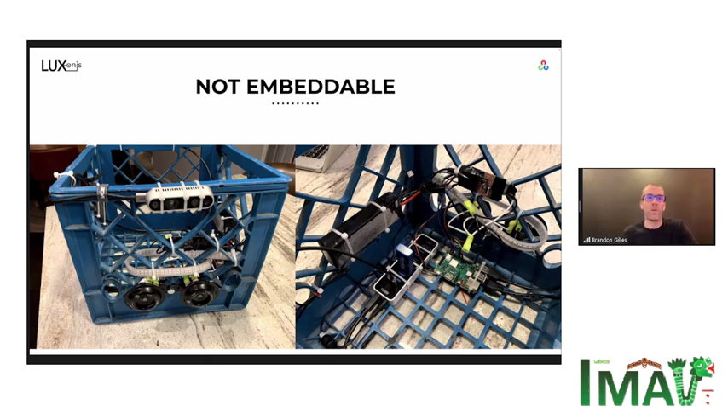But the problem was it wasn't embeddable, and I wanted to make a bike light that could just tell you if a car's on your trajectory for bike commuting. All the folks in my network who were hit were riding their bikes to or from work - every day they'd have 500 cars safely pass them for decades, and it's just that one car on your trajectory you want to know about. This proved you could do that with all the advances since the 80s, coming to being able to do it on the edge. I prototyped this in 2018, I think.

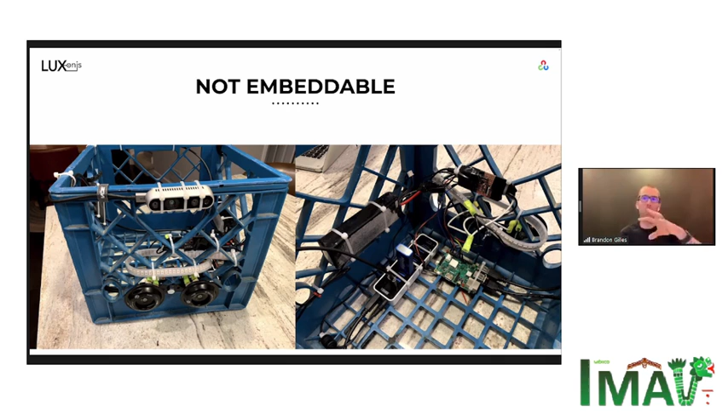This is somewhere between that laptop thing I mentioned from 2017 and now - this is like a Raspberry Pi with a bunch of other junk. But it's not embeddable, you can't really build a product around this. So we set off to see, could you make an actual embeddable version? Does that exist? And the answer is yes.

The Myriad X from Intel was the first thing in the world that allowed you to have all this stuff on an embedded system. You can see a US quarter there for reference at the bottom, and I'll hold it up to give scale. Hopefully my video is not too tiny.

The Myriad X was this really interesting chip, but given that it was so new and so bleeding edge, there was no way for just anyone, an engineer, to go develop something. So we found ourselves in this really interesting space that as engineers, we'd never been there before.

Usually when you go to solve a problem, you quickly discover it's a problem people already solve, and you just buy a development kit and go solve it in your application. Or you think, well, that's against physics, or maybe that will be possible in 20 or 40 years, kind of like the folks who were initially researching this in the 1980s for AI. It caused an AI winter because theoretically it was possible, but it required more computation and time than existed. With 1980s computers, it would take more than all the rest of human history to train a single neural network.

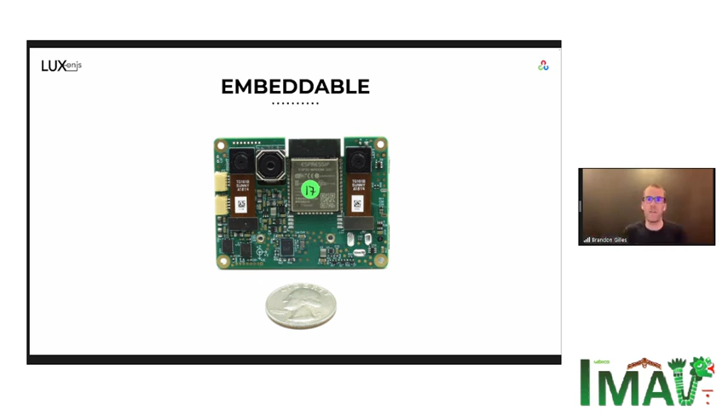So we built the development kit, and we built a series of products around that called the OpenCV AI Kit. So here's one of them.

We were in this space where for months we were just like, this is the chip. When's someone going to make something useful so we can use the chip? We want to use the chip. So we were scouring the internet, seeing what we could find, talking to everyone.

At one point I heard there was someone close to me, like a two-hour drive away, who knew something about it, and I instantly drove there and waited in their lobby. We really wanted this to exist because it would be so useful for us. We absolutely needed it, and we thought it'd be so useful for the world. But nothing existed, and we found that no one had any plans to make anything exist. So we either needed to just give up, which I tend not to do, or build the development kit.

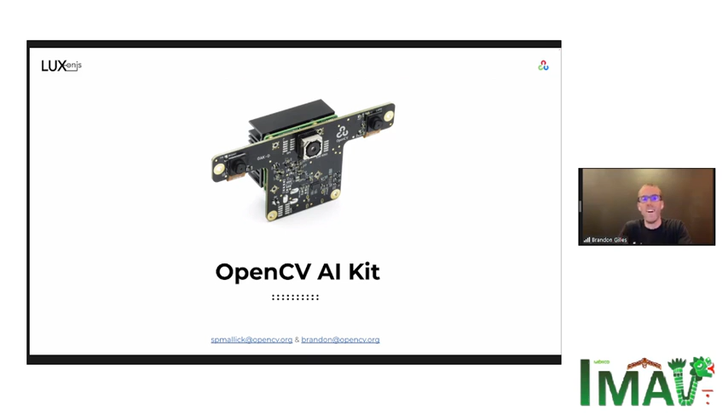So we did that. And while you're doing that, when everyone's refusing to make it and you're spending months trying to figure out who's going to make it, and you decide to make it yourself, there's this weird time where you're like, well, are we just doing something super dumb? Or are we really onto something?

So we launched a Kickstarter, and that was the first time we really got that answered, that people were like, yeah, we need this too. Why isn't this a thing? This chip would be so perfect.

So we launched the Kickstarter, and that validated that folks wanted to have an embedded system with all these capabilities, and wanted to be able to use this chip, which was the only chip in the world so far that could do this.

The Movidius team and Intel team were way ahead of their time, and the guy who started this chipset also saw this coming back in the early 2000s or late 90s, and had been working his whole career to make this happen. Myriad X was the culmination of his career in that regard, and so he was of course stoked to see that someone actually made it so folks could use it, besides the billion and trillion dollar companies who were using the chip beforehand.

So we launched the Kickstarter, and for this type of device, all the categories that it fit into, it broke all the records. For any printed circuit board project, it broke the record. For an AI project, it broke the record. CV project, it broke the record. Depth sensing project, it broke the record barely.

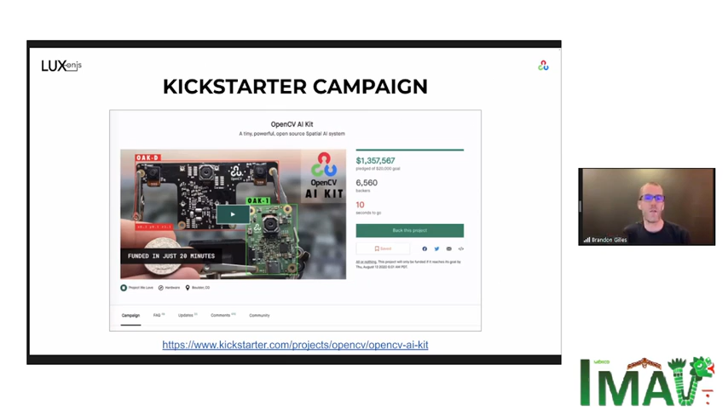Occipital, who I mentioned, had the record previously, and they raised like 1.2 million in 2012, and we raised like 1.3 million. So technically, with inflation, they probably still hold the record.

So we did that, validated that people wanted it. So then the question is, how do we actually access this? How do people take advantage of it? We really wanted it, and so we built what we wanted to find on the internet, right? Which is, we didn't want to have to talk to some sales guy. We didn't want to have to put like 100,000 or $500,000 or $20 million down just to prototype something.

So we made it open source, MIT licensed hardware, software, and AI training, so that anyone from a student—we've had high school students build custom hardware around this—could go build their embedded system. And so now it's this whole ecosystem of that. So these are all, everything you see here is open source.

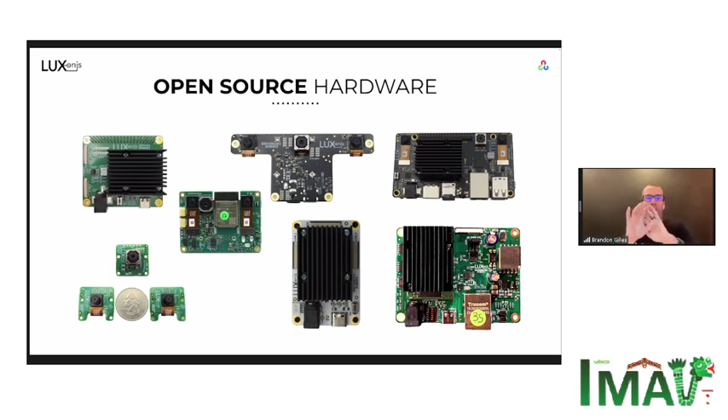And that begs the question immediately, how do we monetize? So we do all these open source designs, and then we have a system on module on there. So when you go to build something, we're just a component on the design. So you're buying an inductor from Murata, and you're buying a Trxcom, Ethernet, or what have you, and then you're buying a Luxonis system on module. But we try to keep that as small as possible, and then folks can customize and integrate into tiny things easily.

It's open source software as well. There's all sorts of applications out there that you can use. Open source AI training, and also one of the things we're most excited about is how is it actually open source? How do you integrate it? So it's open source at the software level, so you can integrate it with a Raspberry Pi or something that runs Linux or Mac OS or Windows, or some OS we've never heard of.

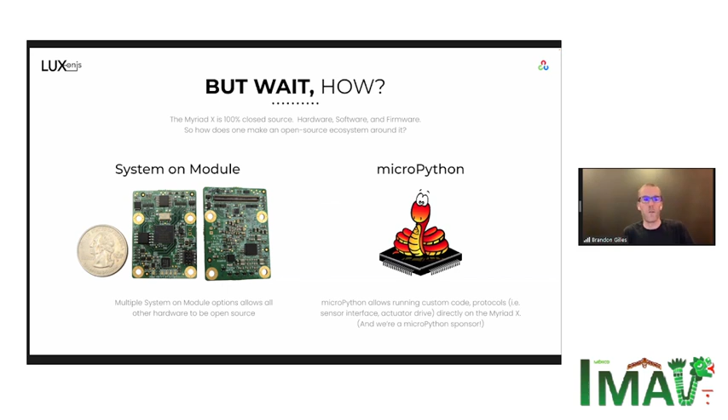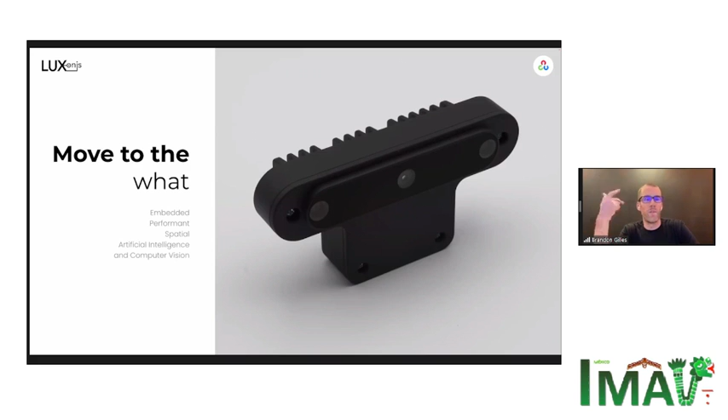But it's also open source at the embedded level, at the microcontroller level. So one of the products—they all use the system on module, but this one has an ESP32 on it, on which you can run MicroPython. You can run other drone control algorithms, stuff like that, on a pure embedded system. And then to what I talked about, wanting it to be embedded, performant, spatial, with artificial intelligence and computer vision—this is our OAK-D model, also open source.

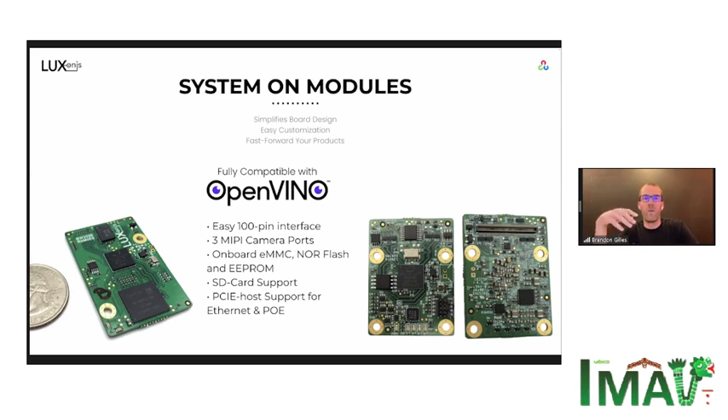And then, as I mentioned, the system on modules are what allow you to integrate this into what you want and customize any of this hardware that I showed here. And we have standard models. The reason for these is some folks do just want to put these directly on a drone, right? Like you don't want to customize it, you just want it to fly.

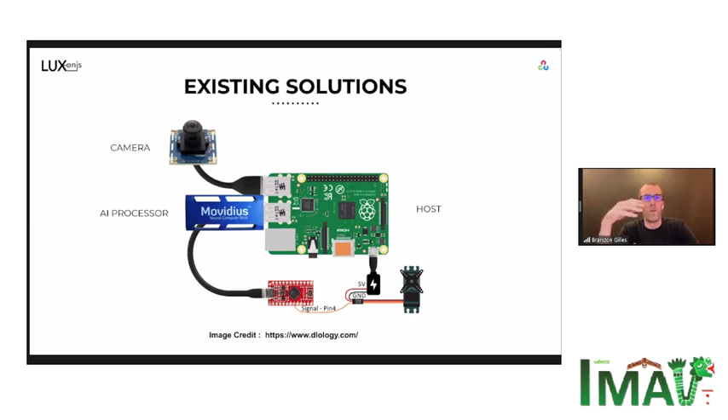So here's Oak One. You can think of this as, here's the existing solution: you buy a camera, you buy an AI processor, a Pi, and then maybe some controllers. You tie it all together. This combines the camera and the AI processor into one device. And we have the embedded version that I showed you that then also has a microcontroller built in. And then OAK-D is the 4K camera, stereo depth, and the AI processor—all those building blocks that I talked about—into a single device.

And then, probably more interesting than all of those—super interesting if you already have some Linux system on your micro drone, for example. But some of these drones, you don't want a Linux system, right? That adds weight and cost and power. And so we have this IoT series, which is all of that. It's all of the processing that I talked about with an onboard ESP32, which then can be used to run embedded code.

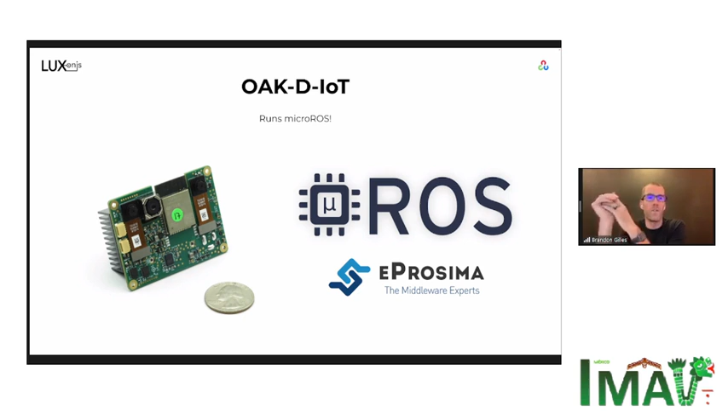So folks have run micro-ROS on it, for example. And on all of these, it's OpenVINO compatible. So you can do object detection, face, vehicle detection, pedestrian, text detection, and a bunch of stuff we can't even think of. And the most important for drone applications, really the crux of everything, is you can run AI so you know what objects are.

That allows you to detect objects even if you don't know what they are. Like there's some object in front of your drone, you have no idea what it is. You can still use an AI model to detect, hey, that's an object and it's in this position, which can be really useful for not having to parse point cloud data, because parsing point cloud data to detect an object can be painful—you have to think about how to classify something as an object and avoid it.

There are class agnostic object detectors you can use. In the embedded instance where you don't have a host processor to do logic like that, you can run one of those, combine it with depth information, and do obstacle avoidance or tracking.

Pose as well—there's some cool examples where you can do hand tracking, person detection, then zoom in and do pose to find a wrist, choose which wrist you want to talk to, then find the palm and run a palm detector. And then you can do sign language and control your drone in 3D space.

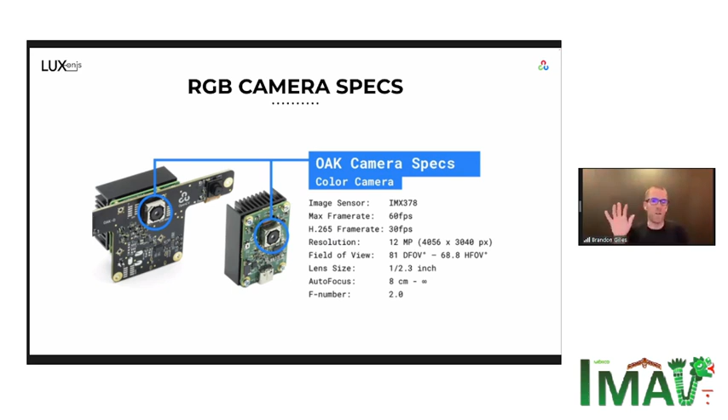And on these models, which again are open source, you can actually use different image sensors. There's a 12 megapixel sensor. We found that extremely useful so you could punch in - AI detects one thing, then you pull a high resolution out of that, it detects that, pull a high resolution out of that. And 30 feet away, you're still reading sign language off a hand.

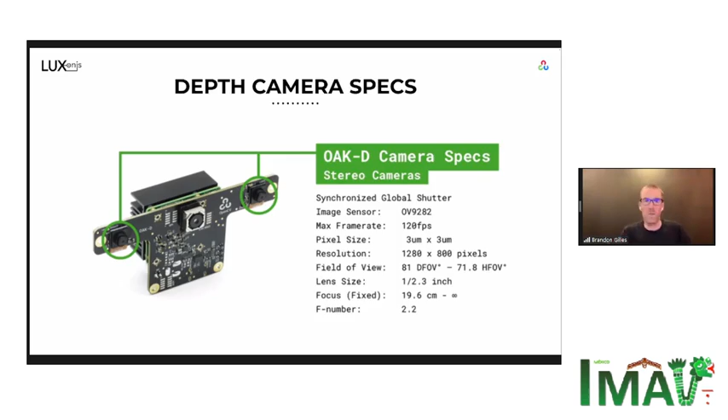And then global shutter grayscale, so you can get high resolution depth. There are options for this, and we have open source reference designs for all of these. This is the standard - it's 1 megapixel depth. This smaller, lighter version is just 300,000 depth points. And then we have a higher resolution, which is 2.3 megapixel depth. Really easy to get up and going.

We have installers - you can just do apt-get install on Ubuntu. The Windows installer is super easy. And then maybe more importantly, there's this whole community that we're developing. This all goes back to the thing we wished existed so we could develop our product easily and quickly, so we decided to take that upon ourselves.

And then finally, where is this used? Tiny aerial and subsea things are a big one. Obviously for this conference that's super relevant, but generally just tiny things where you want an embedded system but you want it to have all these human-like perceptions - spatial AI and CV all together.

E-scooters, micromobility - that one's actually kind of counterintuitive. One thing is what we originally wanted to solve, which is keeping people who ride bikes safe. But there's also flipping that on its head - people who ride e-scooters in downtown cities. Most are respectful, but there's always that jerk who buzzes through people going really fast and unsafe, and goes around blind corners. So you can have this installed in an e-scooter, know where people are, and automatically slow the e-scooter down.

Visual assistance is really cool - this is human-like perception on a tiny device. If you have visual impairments or you're outright blind, this can be a huge help because it can tell you where things are, is the vehicle on your trajectory, or you're about to walk across a crosswalk, and so forth. There's some really cool bleeding edge research going on there.

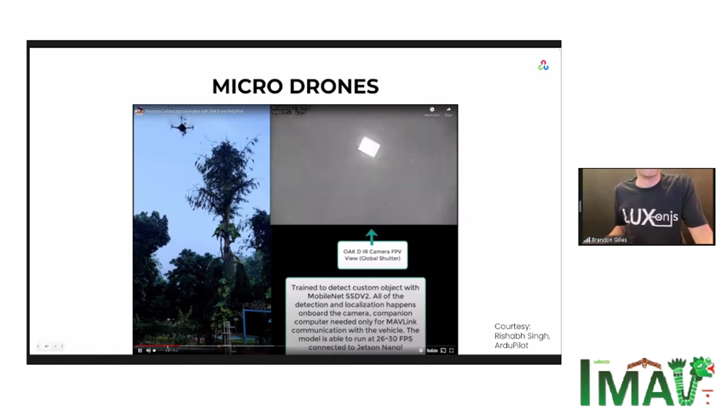This shows running depth perception and a custom object detector trained for drone landing. You can see it's finding the X, Y, and Z position, and it's actually guiding the whole drone. Let me turn the sound off, I'm sure you're used to the sound of drones. So it's finding the target and then auto landing based on that, using the depth perception and AI.

The next thing being worked on is doing all of this on an IoT version, so you don't even need a host computer, except if you just wanted to visualize. So that's one example, precision landing.

Another thing, we've been responding to the drone community. When we first made this, we didn't think the drone community would want it. We see so much from big drone companies, and one of the few that got access to the Myriad 2, the precursor to the Myriad X which didn't have nearly as much AI capability or a depth engine, was DJI. So we figured, are we really going to add value? It seemed like drone folks were covered, but actually there's a huge response because the ecosystem is customizable, so you can make what you want.

One recent test was with an autofocus module, because there are a lot of locations where you'd want autofocus. The default hardware was autofocus, you can see on the right here. Depending on the vibrational modes and amplitude on the drone, it can really mess with autofocus because it's electromagnetically controlled - a free moving lens, with electromagnetics holding it like a speaker is moved.

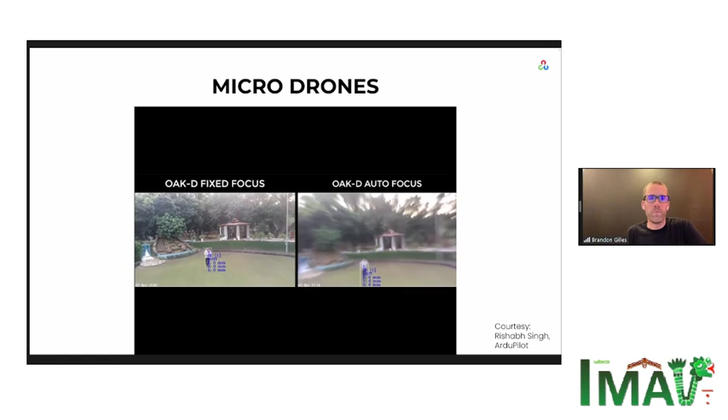We have a Discord where there's a large community of folks who can communicate, prototype, and debug. The threshold for distance was set wrong, so it wasn't allowing distance measurements above, I think, 4 meters or something. That's why the distance measurement is wrong on the bounding box here, but you can see it's way better. The IoT version is on the top there, and that just happened to have autofocus, then fixed focus - but both are orderable with fixed focus.

This is Rishabh's next objective that I wanted to present - you can see it's very recent, that was 2 days ago. Someone was asking him why he's taking this next approach, and he says the IoT version is really interesting because it's the first time you have such interesting applications without a companion computer, which is one of our core objectives.

Robotics is the big one. UAVs, drones - we view those as flying robots, that's fundamentally what they are. And embedded robotics is our core focus, so that's what he's going after, that's what he's building in ArduPilot.

On the right there, you can see one of the OpenCV IoTs, where that could be literally the whole thing on the drone that also just straight up controls the drone, which goes back to research in this conference, which is super exciting.

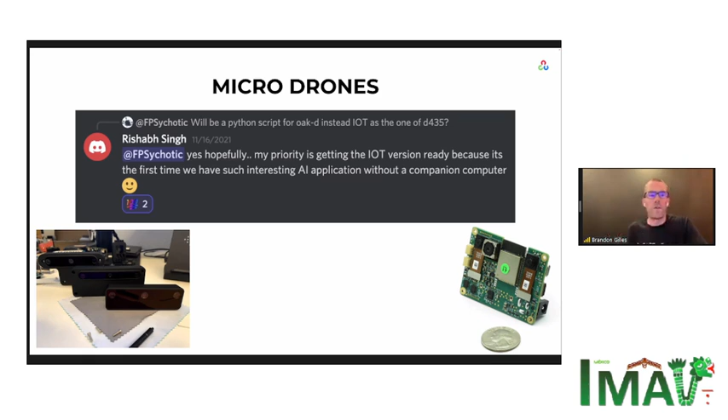On the left, you can see progressions. All of these are actually buildable, especially since it's open source, in an IoT version. So it could be standalone. You just have IO that goes to your motor controllers, and it just flies your drone. So if you have some application, and say you train a custom neural network, you can just fly your drone directly, nothing else involved, which is super cool.

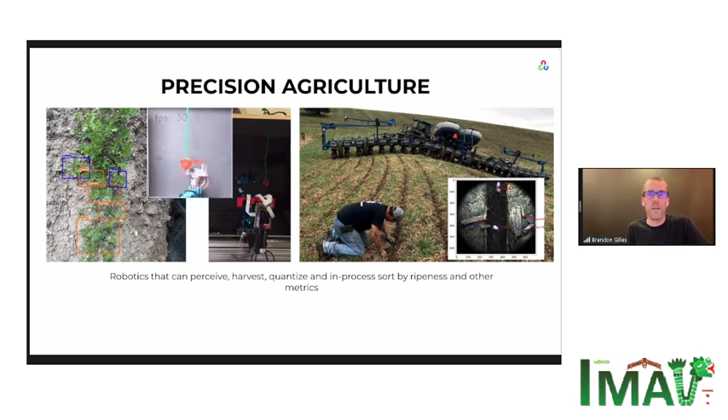This is a system we want to allow folks to just get up and going, where you don't have to do a bunch of work. So you can just buy this online, there's Amazon Prime. Unfortunately, we don't have Amazon Prime in Mexico yet, but we're working on it. You can still go on Amazon and they'll just ship it to you, but it's just not as convenient as if it was Prime native to Mexico. But soon, Mexico and Canada are the next two.

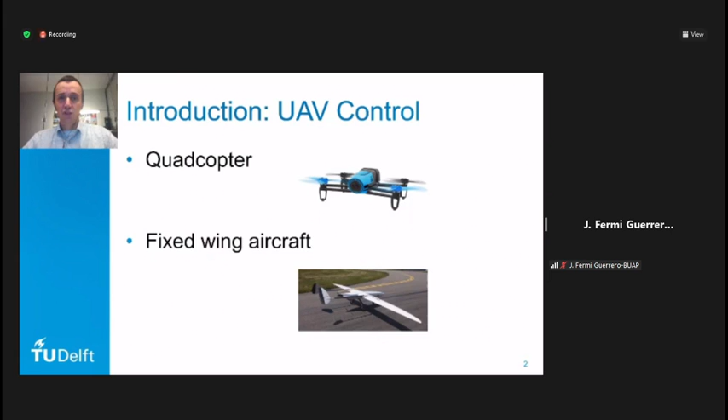For a long time, research on flight control of UAVs was focused on quadcopters because they are simple, cheap, and versatile - they have only 4 moving parts and are therefore a great study object. And fixed-wing aircraft, because they have very good endurance and a very good lift-to-drag ratio, can stay in the air with little energy and thereby achieve very long ranges and very high speeds.

But recently, in the last decade, a lot of attention was given to so-called hybrid UAVs. One of those hybrid aircraft is the Nederdrone, developed in Delft to be a versatile vertical takeoff and long endurance hydrogen-powered aircraft. The fuselage is shaped around a pressure cylinder with hydrogen, and in the rear we have a fuel cell. It has very high aspect ratio wings for minimal drag and long endurance, and thanks to its 12 motors spread over the long wing, we have hover capabilities.

The objective of this study is to improve the accuracy of the position control of the hybrid Nederdrone for missions like landing on a moving vessel, which is typically surrounded with wind and turbulence. One of the objectives of this study is to not need hardware modifications - it includes running a controller on board the same autopilot with the same microcontroller, which excludes some of the most advanced control theories. The Nederdrone is now flying with incremental nonlinear dynamic inversion control.

The nice property of this type of control is it is sensor-based. You only need a good model of the controls, so a good estimation of the control effectiveness matrix, but you don't need a very accurate aerodynamic model of the whole platform, as the sensors - the accelerometers - are actually measuring the external forces on the platform. The implementation includes a linear model to create reference signals before it enters the INDI control, and the work presented in this paper is about how to create effective reference signals for hybrid UAVs.

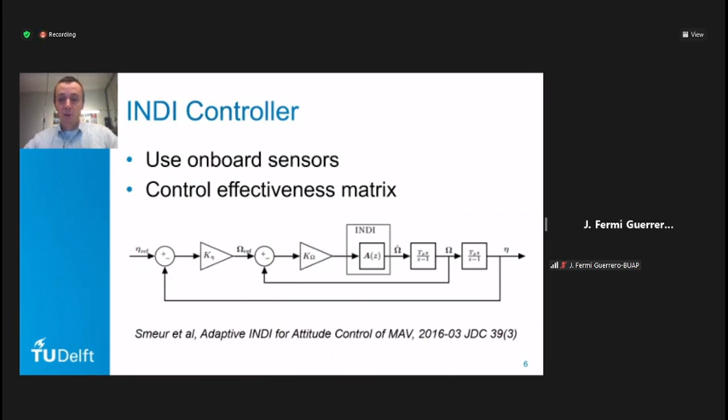This feedback system can be done either in Euler angles or in quaternions. The quaternion is basically one rotation between 2 coordinate systems, and it's mathematically the shortest rotation. Very interesting. But recently another suggestion came up, which is tilt twist.

This one splits the pitch and roll from the yaw, as in most helicopters the thrust vectoring principle is used for position control, and that has a higher priority than setting the yaw. But when flying in quaternions, the matrix multiplications correspond to the shortest rotation between two coordinate systems.

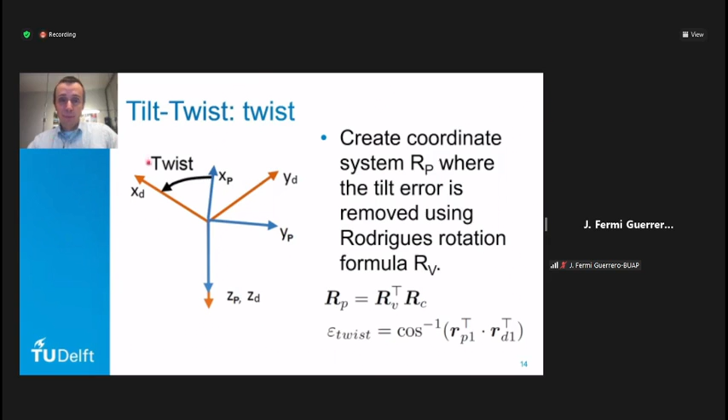For the twist, it's a bit more fiddly. We need to create an intermediate coordinate system called RP, which represents the attitude, what the attitude will be after correcting for the tilt error. This is done using the Rodrigues rotation formula, RV, which describes the rotation of a vector along another vector. The twist error is then defined as the inverse cosine of the dot product between the two x-axes.

This simulation shows that with normal quaternion control, as long as your yaw angle is not reaching the desired value, then your pitch and roll are disturbed. And for some platforms that's particularly important. For instance, in the NederDrone with very long wings, which can catch wind, this effect shows up very hard.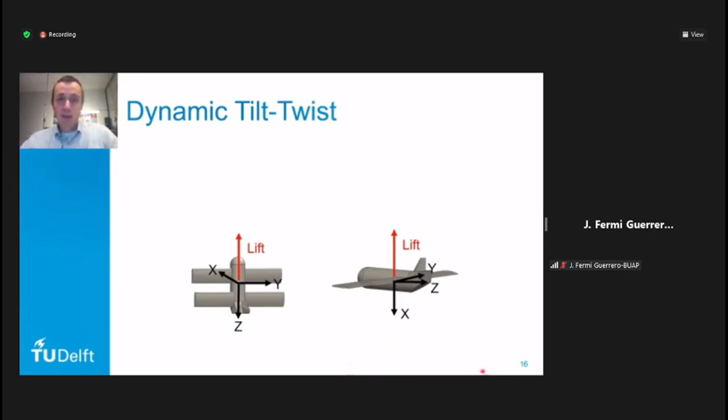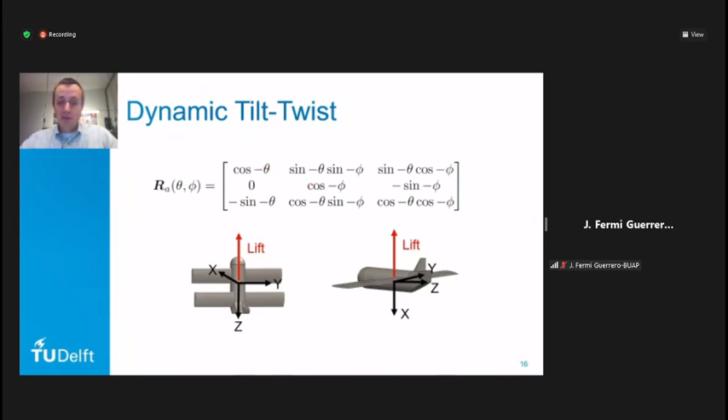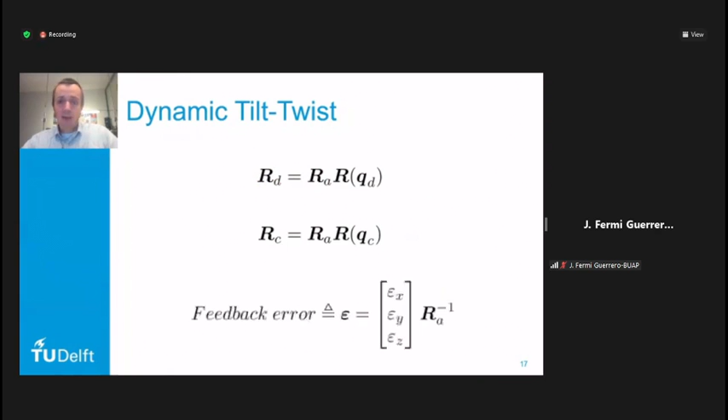To address this, dynamic tilt twist was introduced, which states that not the tilt axis should be performing the shortest rotation, but the lift axis, and by introducing a rotation matrix with the transition angle, we can achieve that. The total formula for dynamic tilt twist comprises a simple correction for the transition angle before performing the same tilt twist algorithm as shown before, and the feedback error then needs to be reconverted after having had its lower gain, so that there's time separation between tilt and twist.

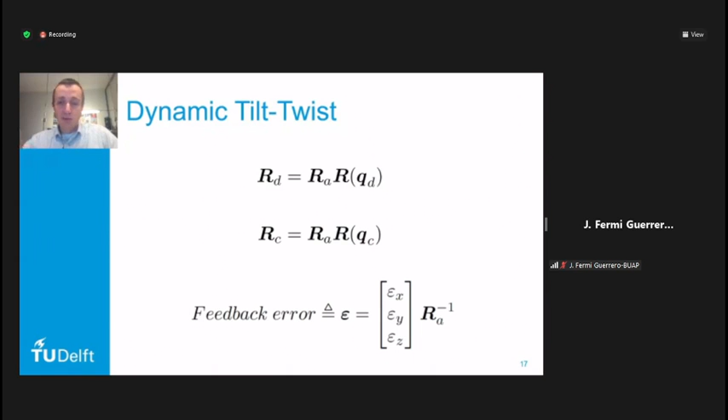To address this, we made a simulator with a more complete model of the drone, the Nadir drone, and had it fly between 2 points back and forth. But during the flight, large jumps in set point were introduced, errors which the drone could never track, errors way beyond its capabilities.

In the bottom plot, you see that the desired set point has abrupt changes to simulate what would happen in case the wind would pull on a wing or turbulence would destabilize temporarily the yaw of the Nadir drone, and then seeing how the rest of the position control holds up.

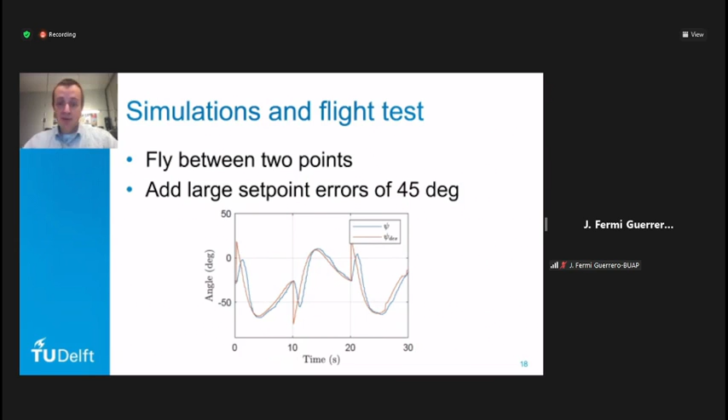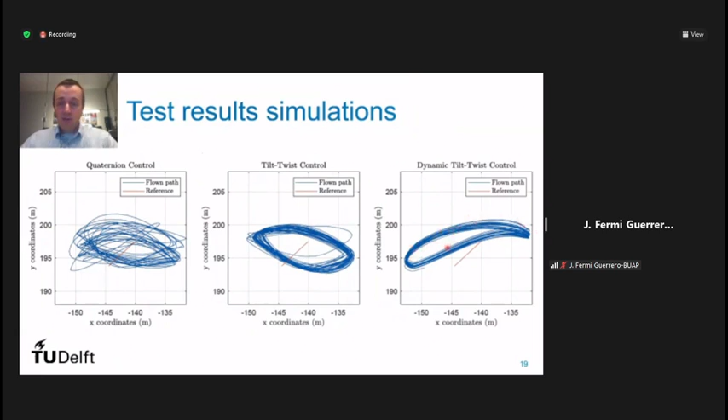The result looks like this. We compared quaternion control in the first plot with normal tilt twist and with dynamic tilt twist, 3 controllers. The simulation included a model that was not perfectly tuned, but nevertheless you can clearly see that the quaternion control yields much less repetitive patterns, and that the one that's most aligned with the desired direction is the dynamic tilt twist control. The exact same algorithm was then tested on the real Nadir drone.

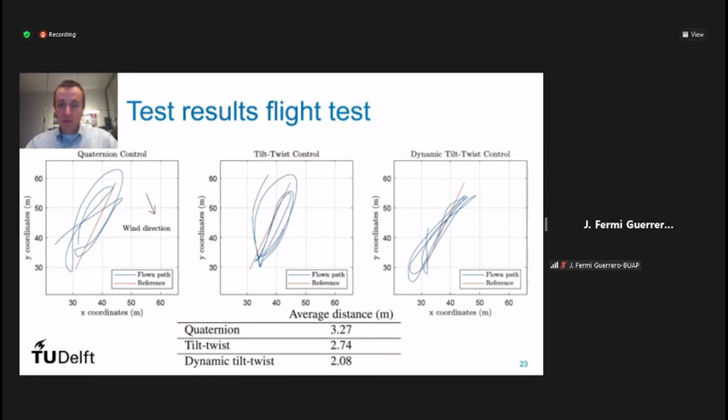Quaternions give the shortest rotation between the attitude and the set point. It's a mathematical formula which gives no shorter rotation. But if you have very large set point errors and differences in response speed for the 3 axes, which is definitely the case for a transitioning hybrid UAV, then it does not give the optimal solution, as the thrust vector is not doing the shortest rotation.

Tilt twist, on the other hand, does give the shortest rotation of the tilt vector, but in hybrid and transitioning aircraft, this does not always align with the direction of lift. It's a great method for quadcopters and helicopters, but has shortcomings in transitioning aircraft, like the Nadir drone.

The dynamic tilt twist gives the shortest rotation of the lift vector, even on a transitioning UAV. Combining this powerful tilt twist idea with a powerful controller like INDI gave very interesting results. To our knowledge, this is the first time that INDI and tilt twist were combined. The proposed dynamic tilt twist also yields the shortest rotation of the lift vector independent of the transition angle of the platform. From flight tests, we could see that this helps in reaching the smallest position error, which for precision flying and landing is the most important metric.

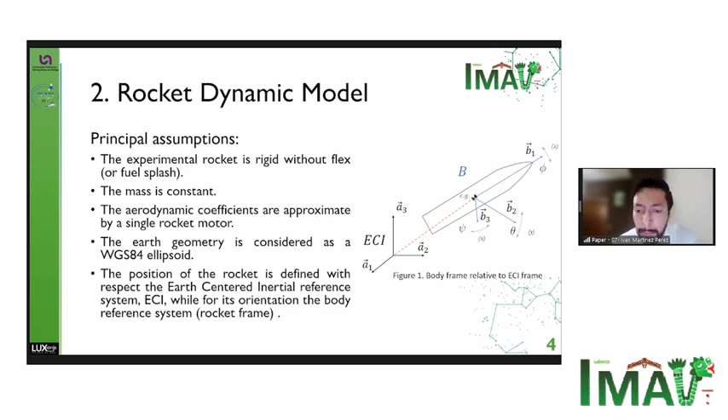Starting with the modeling of the rocket dynamics, we define firstly the translational dynamics to obtain the position of the rocket at each instant of time, which is defined from Newton's second law, where it's necessary to know all the forces acting on the rocket: thrust force, aerodynamic force made of lift and drag, and finally the gravity force. Thus we obtain equation 2.1.

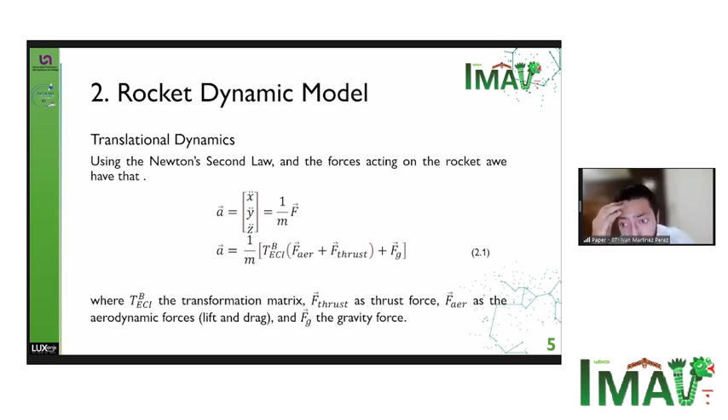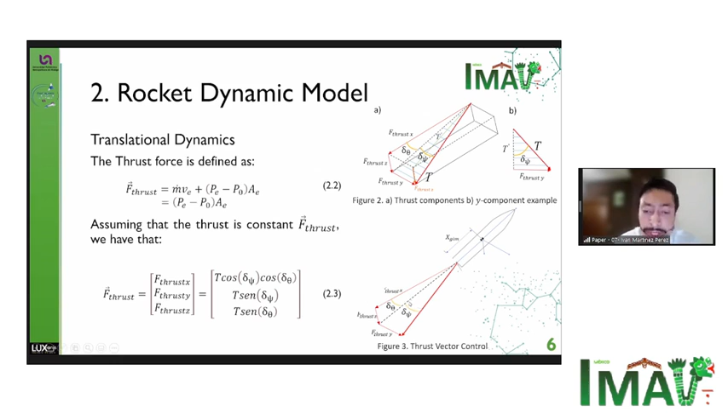Defining each of these forces, we have first the thrust force, as we see in equation 2.2, where it represents the total thrust force. As we see in figure 2, taking only the components by means of triangle relationships, we obtain the thrust vector control. In figure 3, we observe the angles delta theta and delta psi that represent the 2 degrees of freedom of movement of our nozzle. Finally, we obtain equation 2.3.

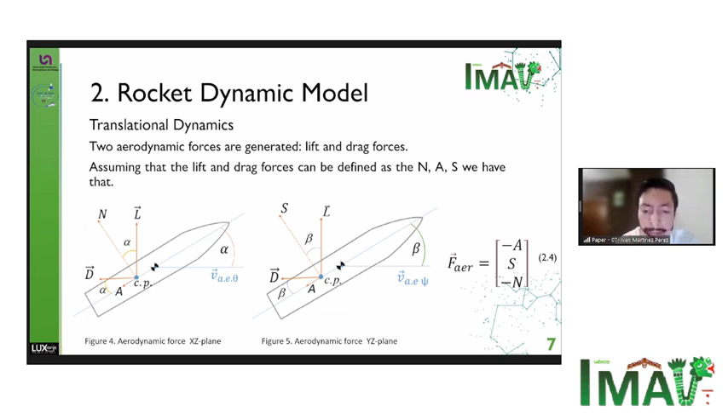Now moving on to aerodynamic forces, we have lift and drag, where for simple geometries like the rocket we can use the component of the normal force N, as we see in figure 4, and the axial force A. Now changing plane, in figure 5 we can see the third of them, the lateral slip force, which in figure 4 is normal to the plane. Thus we obtain equation 2.4.

For a more real condition, we know that the rocket in flight tends to have a small deviation known as track, where the angle formed by it and the actual trajectory is known as drift. As we see in figure 6, the vector V represents the track, and the angle formed by it and the z-axis is the angle of drift, gamma. We have this same peculiarity in figure 7.

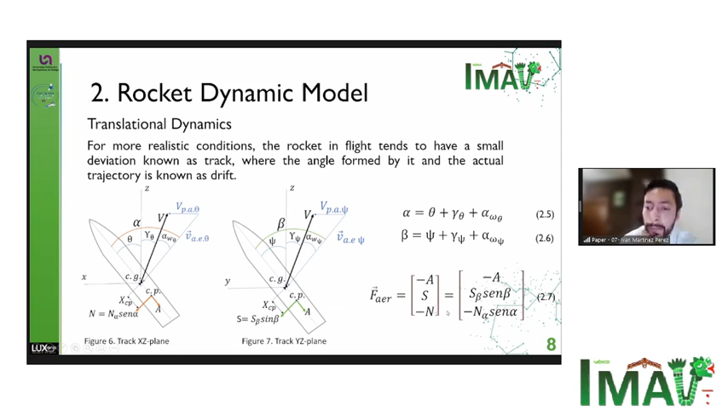Defining each of these angles: the angle of attack alpha, and the angle of lateral slip beta. First we have the orientation angle, the drift angle, and finally the angle of air disturbances. Redefining the last equation, the equation of the aerodynamic forces, by S and N about the forces, we obtain equation 2.7.

Now as the last force, we have the force of gravity, whereby using the ellipsoid of WGS 84 for a better approximation of the geometry of the Earth, a better approximation of gravity is obtained. It should be noted that this model uses geocentric inertial coordinates, so it is necessary to make a transformation. Thus we obtain equation 2.8 about the gravity force.

Finally, the translational dynamics, considering the aerodynamic force in conjunction with the disturbance, the thrust force defined by the thrust vector control, and finally the force of gravity, considering the geometry of the Earth as the ellipsoid WGS 84, we have as result equation 2.9.

Now, to obtain the rotation of the rocket, the rotational kinematics are defined, which are easily applied in aircraft. We made use of the Euler angles: yaw, pitch, and roll. This rotational kinematics with respect to the reference frame is described as in equation 2.10, which depends on the angular velocity.

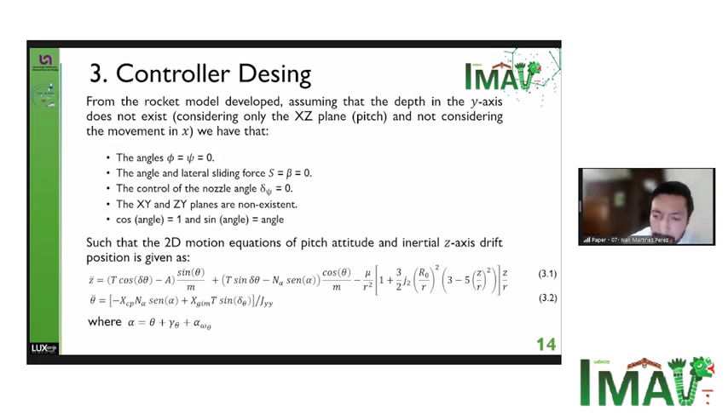Returning to the previous model and writing it as in equation 3.3, where f(x) represents the matrix of the system, g(x) the control vector, and x represents the state of the system, where z and z dot represent the height, and theta dot represents the orientation. Finally, the control input is delta theta with respect to the thrust vector control.

The control law is then proposed as defined in equation 3.4, where the surface S1 is defined as x1 plus x4, and G2 and KD as feedback gains.

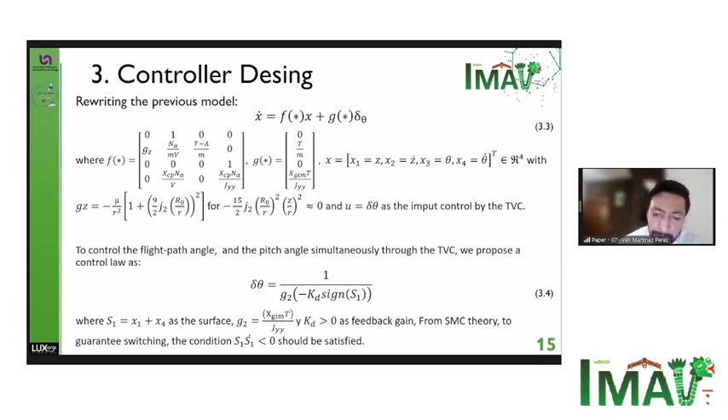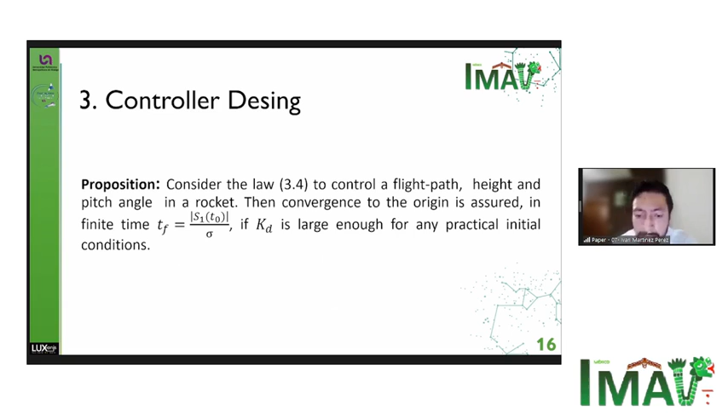Now, taking the following proposition, considering the law of the previous equation 3.4, to control the flight path, height, and pitch angle in a rocket, then convergence to the origin is assured in finite time if KD is large enough for any practical conditions.

Then, by means of a stability proof, we aim to check the condition of the sliding mode, that is, that the surface tends to 0, choosing a sufficiently large gain. This implies that, according to the theory of sliding modes, convergence in finite time to the surface S is possible from an initial condition.

Then, when S is equal to 0, the trivial solution is that x1 and x4 are equal to 0, that is, z and theta dot tend to 0. This considers physically that the rocket is in an initial condition far from the origin in flight, and we want to land or reach a desired point.

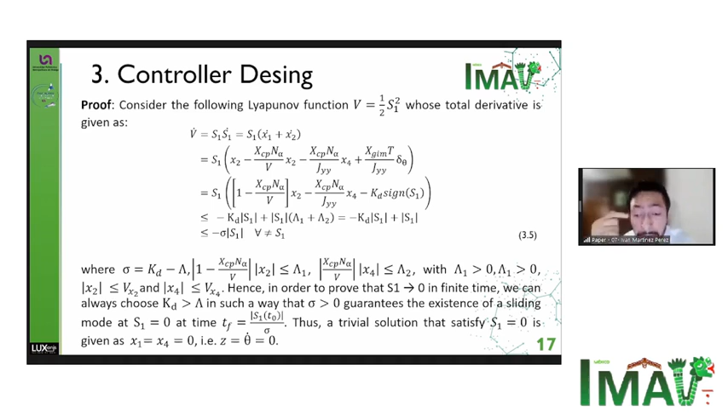Now we can see the results, where the simulation objective is that z and theta tend to the origin given an initial condition. As we see in figure 10a, the control is able to bring it to the origin as the desired state. In figure 10b, the control stabilizes, and finally the angle of drift and the angle of attack in the remaining figures also tend to the origin.

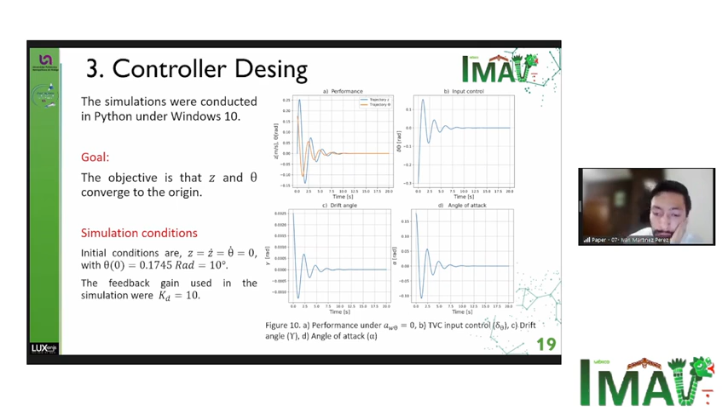Now, starting from this same simulation, adding the aerodynamic disturbance, we have two cases with the intention of checking the robustness of the controller considering their parametric functions.

In the first case, the disturbance is considered a sinusoidal function, where its behavior is shown in figure 11a. However, despite this noise, the control is robust enough to bring the rocket to the desired state.

In the second case, being more rigorous, we propose the disturbance as a Gaussian function, as we see in figure 12a. It is of higher frequency, and as expected, the controller complies with the desired robustness.

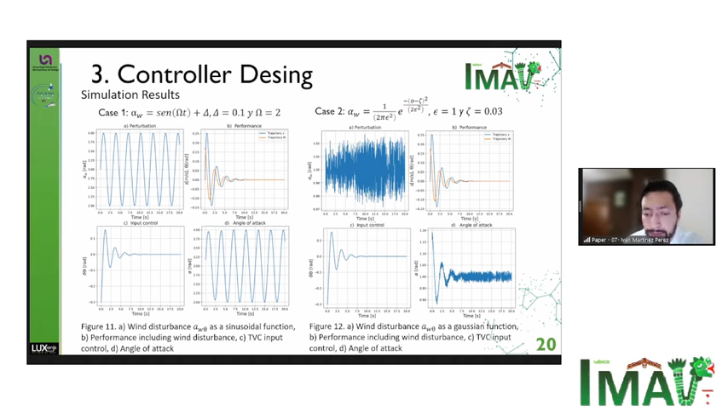Finally, as a bonus to this presentation, a preliminary experimental result on the rocket is presented in order to control an experimental rocket by TVC, as part of my master's thesis in aerospace engineering at Universidad Politécnica Metropolitana de Hidalgo, México.

The conclusions of this work are the following. A complete dynamic model of the experimental rocket using a TVC is presented. A reduced dynamic of the rocket is proposed to control the angle of attack, which allows us to reduce the drift in flight through TVC. Finally, a model-free sliding mode-based TVC is presented to guarantee robustness in the presence of parametric uncertainties.

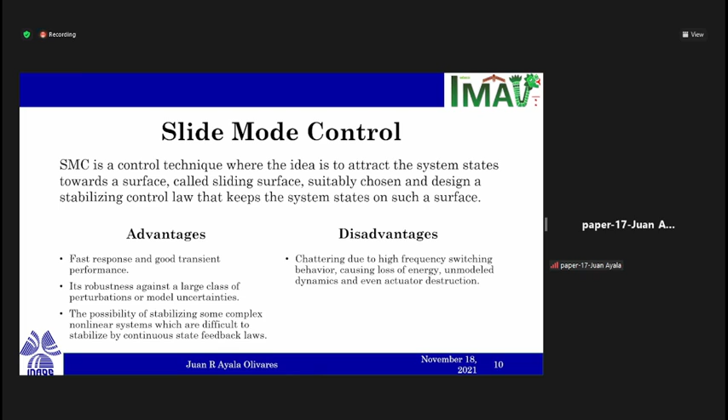Its major disadvantage is the chattering due to high frequency switching, and this can cause loss of energy, unmodeled dynamics issues, and even actuator destruction.

The sliding mode control has this general form for the first order, and the control law is formed of two terms. The first one is equivalent to the system, and the second one is non-linear, depending on the sign of the surface.

The objectives of this work are to design a control law based on a sliding mode technique for a quadrotor using a quaternion-based model, and to design a extended state observer to improve the rejection of external perturbations and uncertainties in the model.

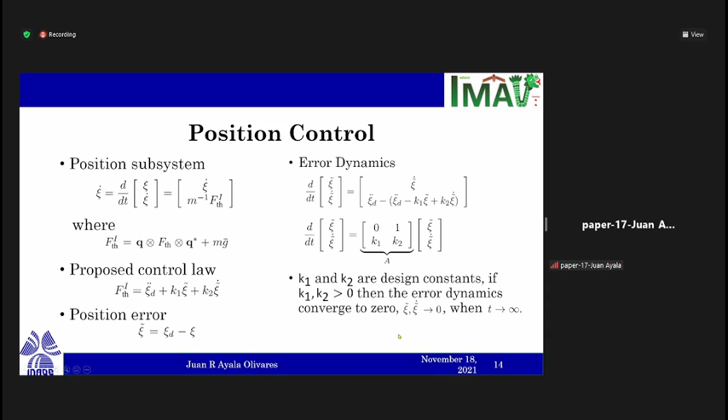The design of the attitude control is from the rotational subsystem using the logarithm mapping, and defining the error quaternion as the difference between the desired quaternion and the quaternion of the system.

The desired quaternion is obtained by applying some properties from the quaternion product and the logarithm and exponential operations.

So choosing a sliding surface of first order where omega e is the angular velocity error, from the derivative of the sliding surface we can obtain the control law for the attitude of the quadrotor.

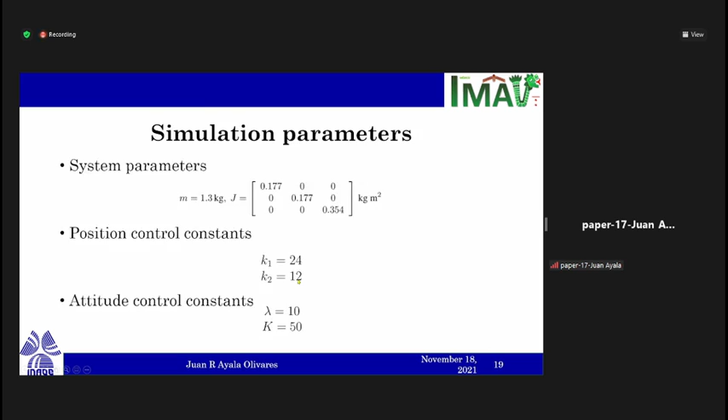And for the trajectory of the quadrotor, it is an upward spiral where the quadrotor is following smoothly and with small errors.

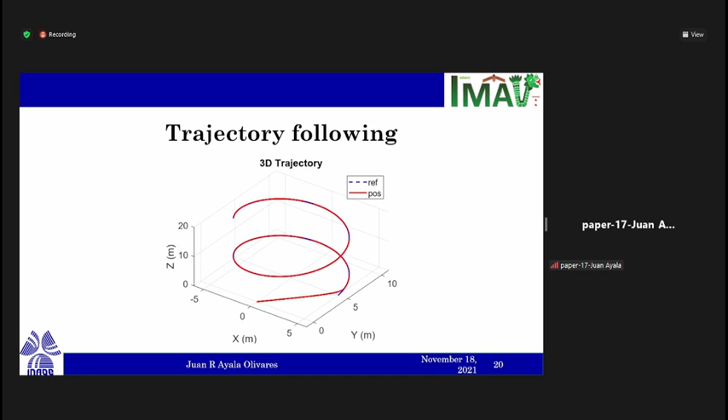The disturbances are just uniform noise added to the inertia matrix, about 20% of the nominal value, and as external disturbances, a sine function is added to the control torques.